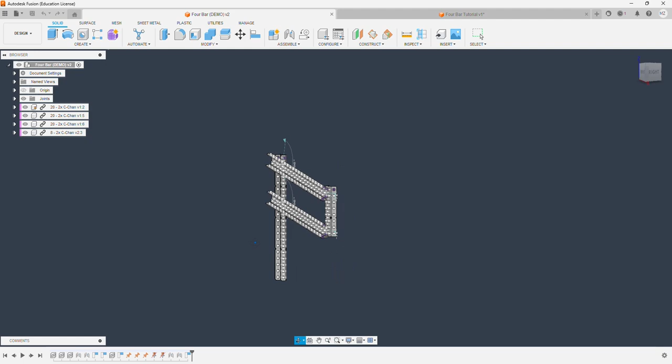So what I have here is a pretty simple 4-bar, and it's made from a series of Revolute joints. And as you can see here, I can just drag the C channel around to simulate movement of a 4-bar in real life. Okay, now I'll be showing you how to actually make this.

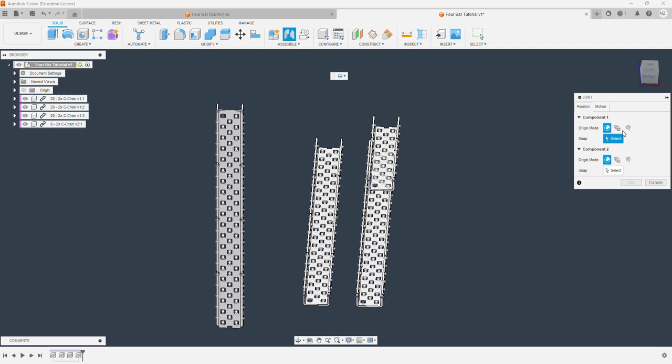So these are the C channels I use. Just import them, you can use whatever length. We're more concerned about the joint here. So first, of course, again, click J to open up the joint menu. And the way it works is the same as a rigid joint. So see here, I have it attached to a point, I have it flipped.

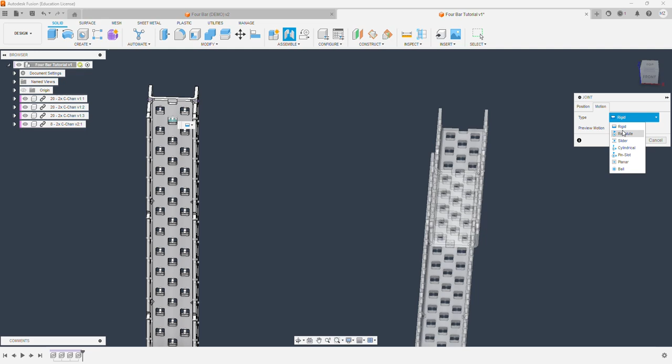And now you have this button here. You can access it either here or on the right side on the joint menu next to motion. So when you click rigid, you'll see a lot of options pop up, and I'll be going over what some of them do later. But first, right now, you want to have a Revolute joint.

So what a Revolute joint allows you to do is it allows the joint, the connection point, to spin on the spot, but it doesn't allow it to slide this way in the other axis, but it allows it to free spin. And we want to use a series of these to simulate the rotational movement of, in this case, a 4-bar, but you can use it to simulate the rotational movement of quite a lot of different mechanisms in VEX. Okay, after that's done, just press OK.

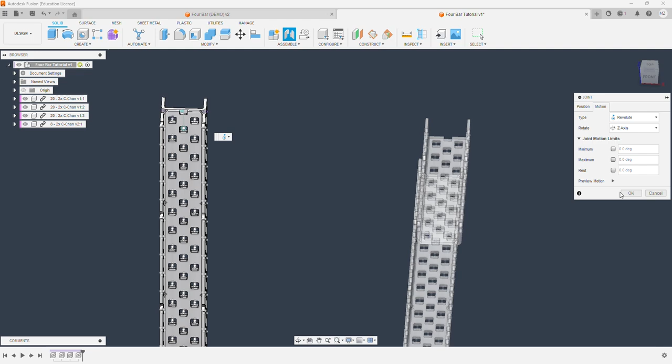And again, remember, we do need to ground a component in this. See, after that's done, you can basically just rotate this wherever you want. And that's basically what a Revolute joint does. If you had a rigid joint here, this C channel would be completely fixed and you could not move it at all. And again, remember to always capture position.

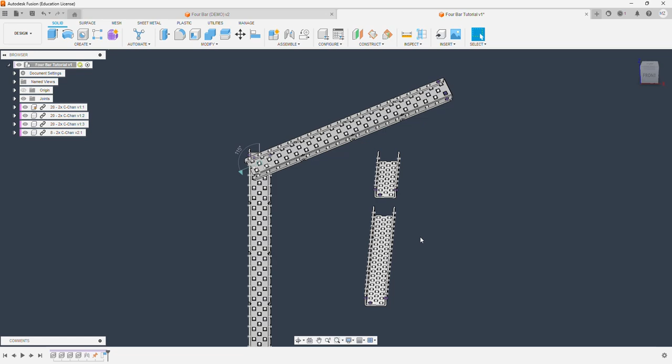Now you've done that, just repeat the same steps. Oh, and one more thing is that since we had last selected Revolute joint, the next joint you make automatically pops up as a Revolute joint. So if you don't want this, you can, of course, just change this to whatever joint you want.

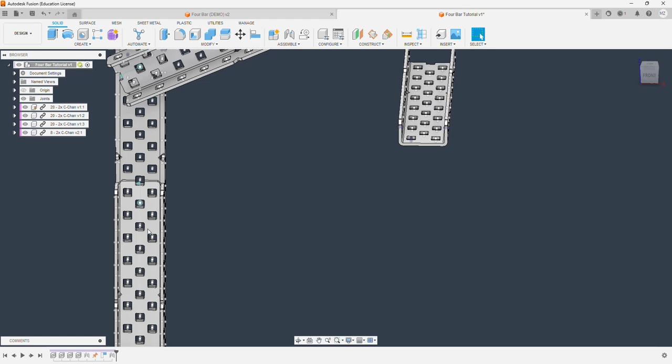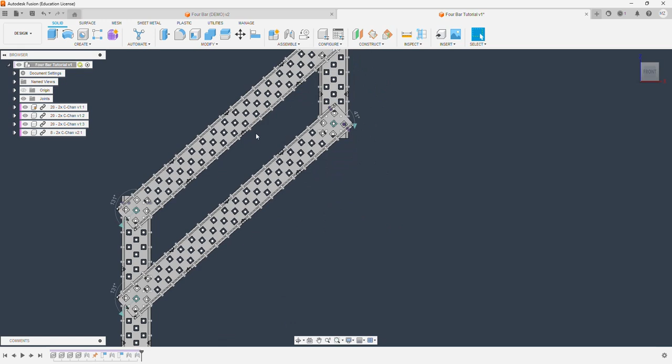Okay, now that we have the C channels attached, we can attach the other end of the 4-bar with, again, Revolute joints. And if you notice here, it does not require you to do anything complex. Once I click the joint button, the series of joints will get simulated by themselves, and they will move. Fusion calculates their movement, so it will act exactly like a 4-bar. So you don't need to do anything complicated if you want to make a 4-bar with Revolute joints in Fusion.

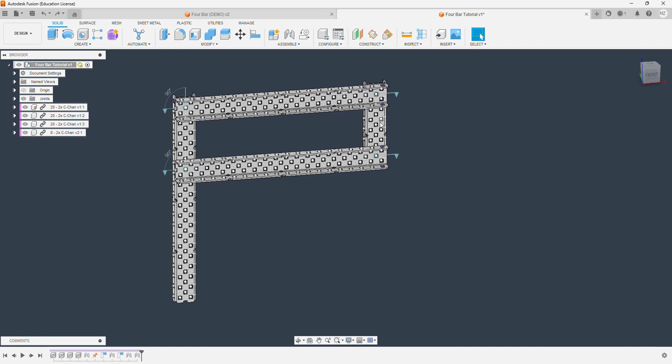A lot of things are kind of automated in Fusion, whereas in something like Inventor, I don't think you actually do, but sometimes you might have to add a constraint, let's say from here to here, or something to match their angle the whole time to prevent this bar from tilting. But in Fusion, quite a lot of this is automated. So usually if you can get a series of joints to work in Fusion, it will probably just work, and probably will work in real life as well.

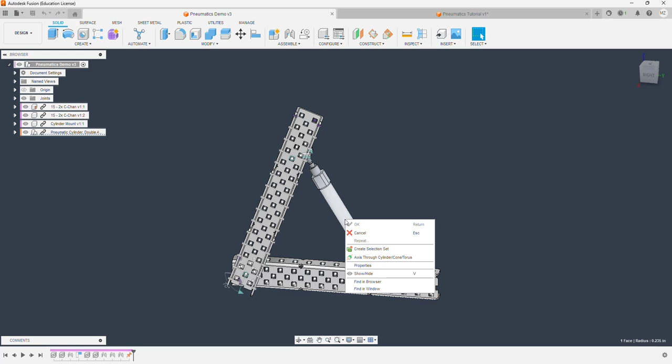Next up, I'll be showing you how to combine Revolute joints with a different type of joint, called a slider joint, to simulate something like a piston movement in Fusion 360. So this is my finished example. You can see here, if I push this, the piston will extend and in turn turn the C channel.

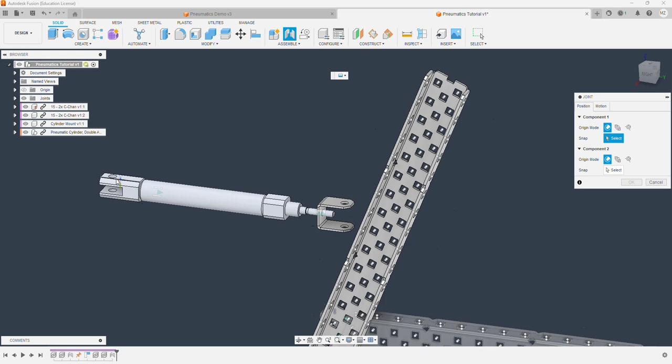Okay, so let's say you're starting from this step right here, where you have the C channel set up with the Revolute joint, as we talked about. And now the question is how do you actually mount the piston on. So if we go back to before, you can see when we extend this piston, the base of it, which is right here, also turns. So what that means is we need a Revolute joint.

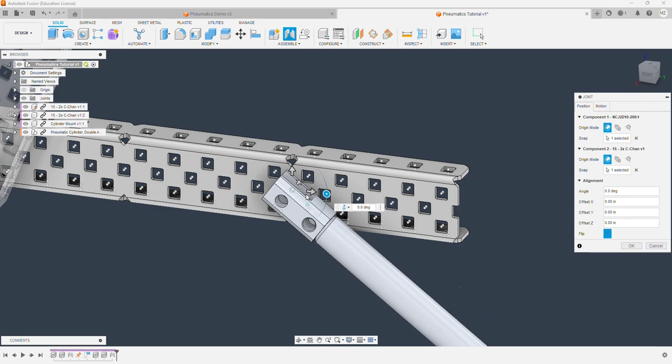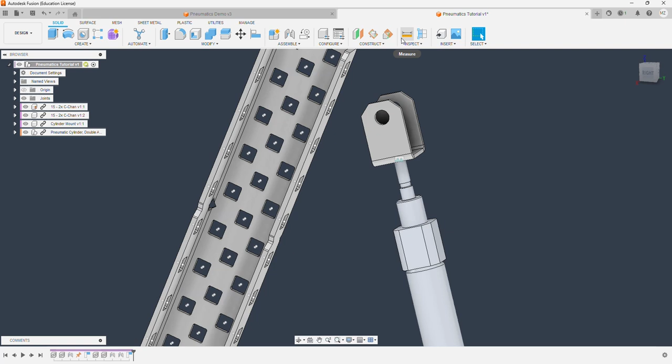Okay, once you have the Revolute joint attached, you can see the piston can rotate freely on the plane that it's jointed on. And now after that is done, what you want to do is join this and this. And since we don't know the actual distance from here to here, and it doesn't need to be exact in Fusion, what you can do is use the inspect or measure tool. And if you get a number like this, you can always change the precision to a very high number, so you can get the full precision.

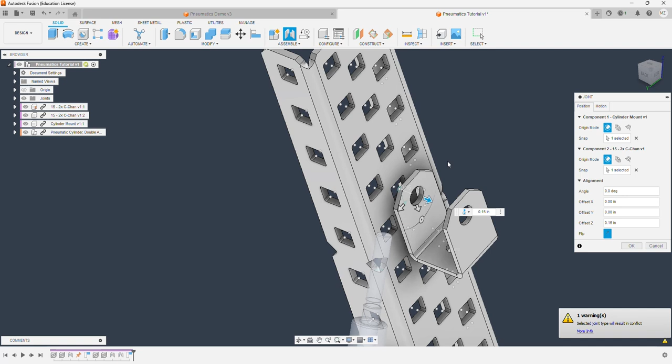Okay, now once that's done, you actually have just finished the whole thing. Because you can see, you can just extend this piston, and the entire system will move with it. Now this is obviously a very basic demonstration of where slider joints can be used, and also where slider joints and other types of joints can be used together to simulate a more complex system.

Other examples where slider joints could be used are, for example, a linear slide, like if you're trying to simulate any sort of sliding motion. For example, if you're trying to build a slingshot or just a linear slide, that's where slider joints are used. But the vast majority of the time they're used to simulate piston movements, because if you really think about it, there's not a lot of mechanisms in VEX that involve linear sliding motions.

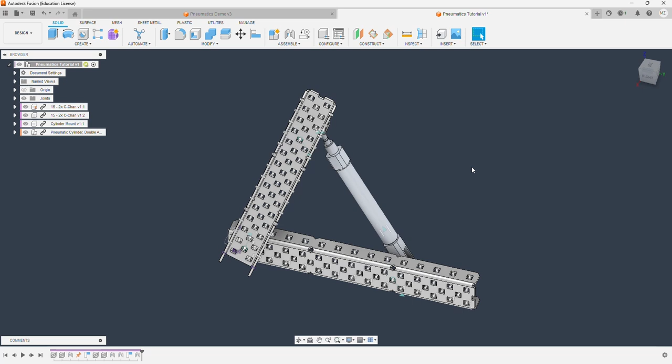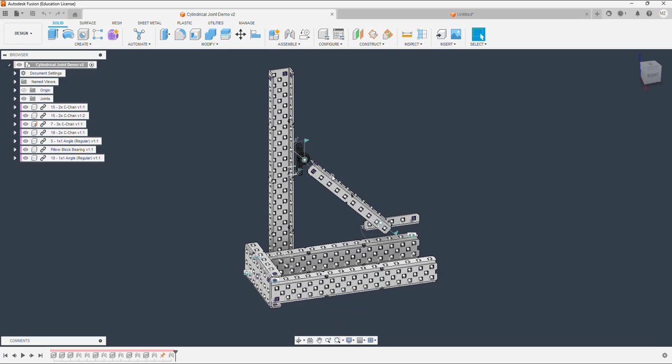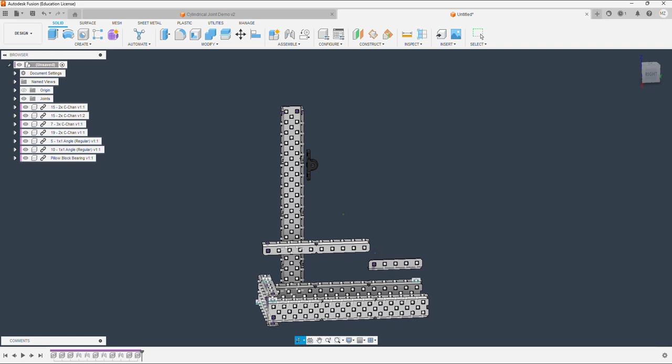Now, if you were to build this with rigid joints in general, it would be really hard because you'd have to figure out what each of these angles are and the distances for these. But I'll show you an easier way to do this. So first, to start off, I already have in this CAD the general structure, and if you really want to follow this, you can just add these together by yourself, and this does really apply to a lot of different things. So first off, what we want to do is add a Revolute joint.

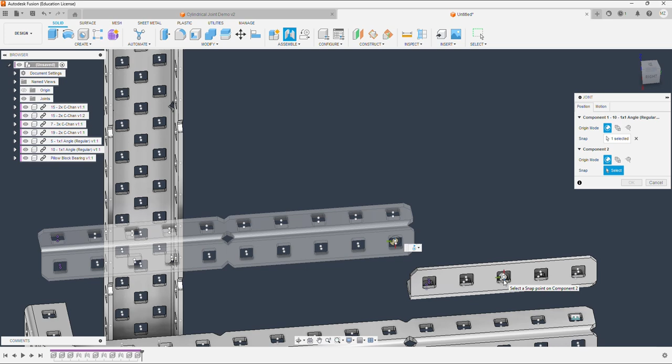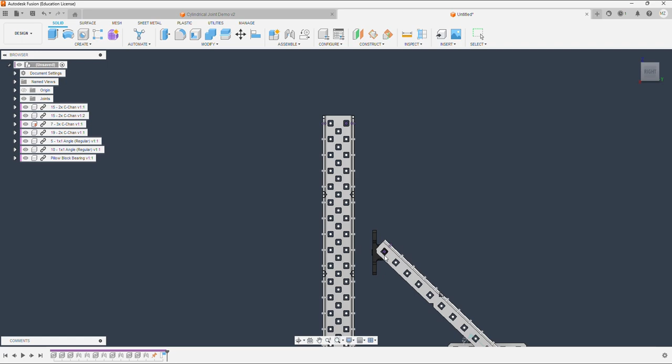Now remember what I said about how Fusion does sometimes make the calculations automatically for you, right? And this is what we are going to be using for this. Okay, now that that's done, what we're going to do next is use a slider joint between the bearing and this piece of C-channel.

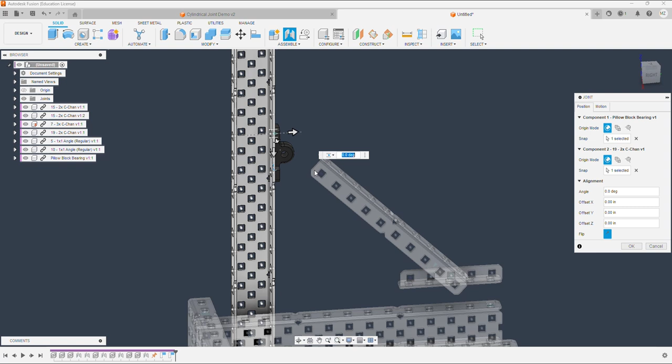And the reason we're using a slider joint here is because we don't really know what the distance will end up being, because we have a fixed distance from here to here, and this joint is fixed at that spot. So if this is a fixed distance, let's say you type in whatever distance you want, then this joint just simply won't happen. There's only one specific distance at which the joint will work, and that's why you need a slider joint. It's because you don't know what the distance will be.

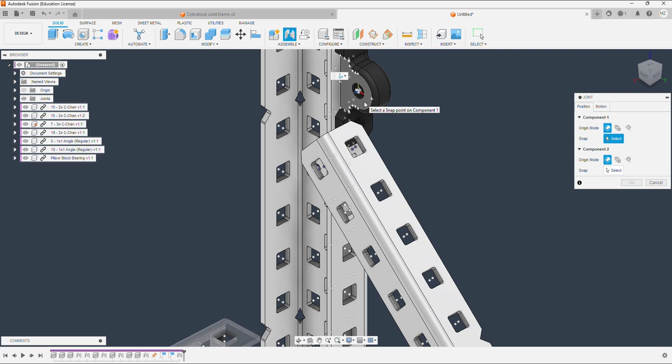Once that's done, we use a different type of joint, which is called a cylindrical joint. This is basically a slider joint and a Revolute joint combined. The reason we're using this here is because you don't know the distance from this point to here. Obviously, you can figure that out using the inspect tool, like I've said before, but often it's just easier to use a cylindrical joint.

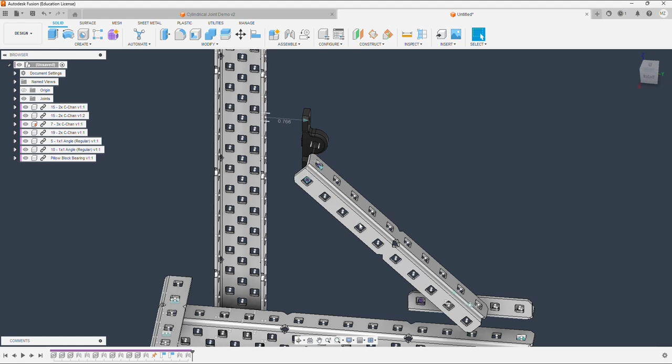Now you notice once I press OK here, obviously this isn't exactly how it is on the thing I showed you before, but that's because I don't really remember which holes stuff is supposed to go on, but you get a rough idea. You see that this triangular bracing here is basically fixed to this pillow block, and the pillow block now has a set distance from here to the C-channel.

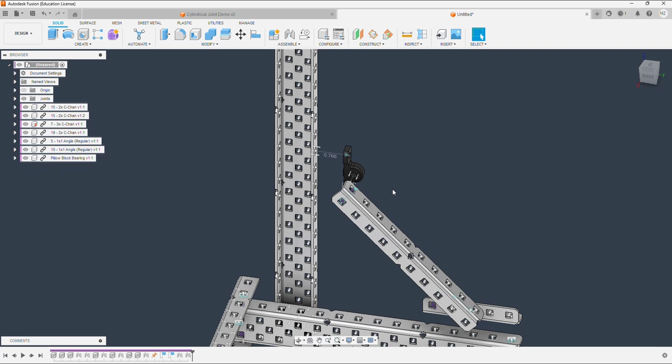Now if we try to move this, you'll notice we can't move anything, because when Fusion automatically computes all the joints, like what this angle is supposed to be, what this angle is supposed to be, and what the distance here is supposed to be, all of them result in basically only one possible solution. Now technically speaking, there's two, because if you drag this all the way to the other side, it will still work, but that usually won't get in your way when you're designing. If it becomes a problem, then just ground one of the components, and this will be fixed here.

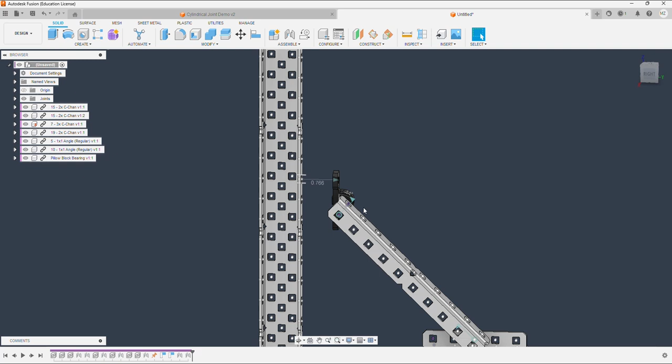And this can be, you can say, abused to make a lot of structural designs like triangular bracing, where often it's really hard to figure out what the spacing is supposed to be. And this could be really advantageous if you use it well, because actually before I learned about this, a lot of my designs were, let's just say, not braced well, and a lot of it is because of how hard it was to make triangular bracing.

And this also goes to show you how joints don't exactly need to be demonstrating or simulating motion. They can also be used for structural designs. Cylindrical joints, slider joints, and revolute joints are really the only things you need for Fusion CAD for VEX. You really never make use of the other types of joints because it's basically impossible to have VEX parts work like those in real life.

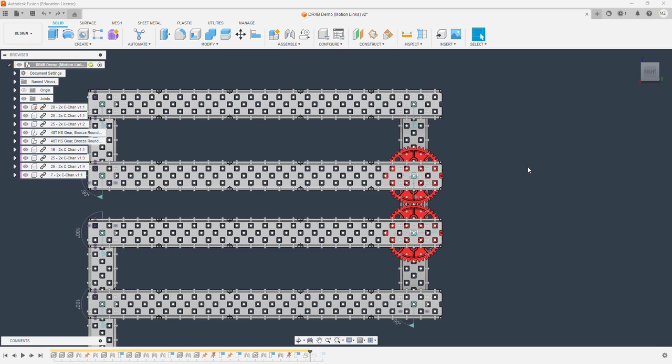Now, those joints are great, but they do have one critical error, which is that they are just individual joints working by themselves. So in this case here, for example, we have two revolute joints on two gears, and Fusion just sees these two gears as individual separate components of different systems. But obviously in real life, when this gear spins, the other gear will spin in the opposite direction.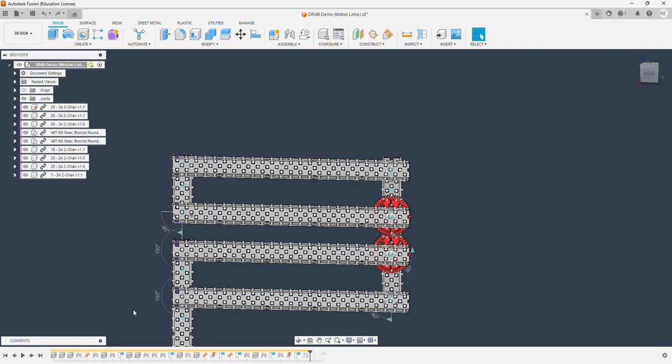Now, that's, for example, how a double reverse 4-bar will work, because when this arm moves up, this gear spins and moves this gear in the opposite direction. But by just using revolute joints, you can see that's not what happens here in Fusion 360. Okay, so how do we actually make it simulate a real life double reverse 4-bar better?

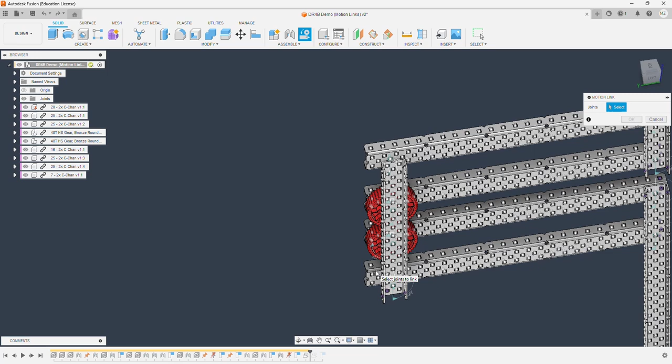So under assemble, you have something called a motion link. What it basically does is it links two joints together, so the motion of one joint affects the other joint, and you can determine what that effect will be. So once you have motion link, all you do is just select the joints that you're trying to link together. Oh, sorry, it appears I already have a motion link. I'll just delete that real quick.

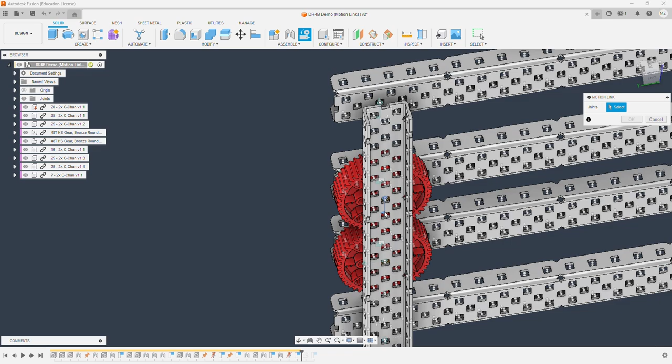Okay, now what you do is you select this joint and this joint, which are the joints you're trying to link together. And once you have this, a new menu will pop up. I'll explain what each of them do here. So this Revolute 9 is the name of the joint, which will probably be this joint. Revolute 8 is this joint, most likely. Obviously, you can change these names under here, joints. Change them to whatever you want them to be.

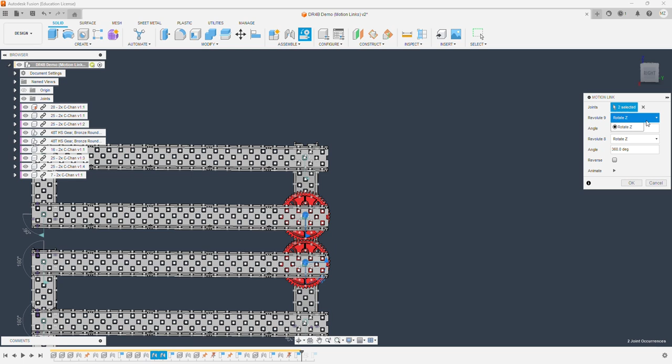And next to it, we have the axis, which will be, I guess, the thing that you're trying to constrain. In this case, since it's a revolute joint, it can only rotate along the z-axis, so that's the only option that pops up. Under it is an angle value, which I'll explain here, because let's say this gear is 48 tooth, this gear is 48 tooth. So what this means is for every 360 degrees that Revolute 9, which will be the top joint, rotates, the bottom joint also rotates 360 degrees.

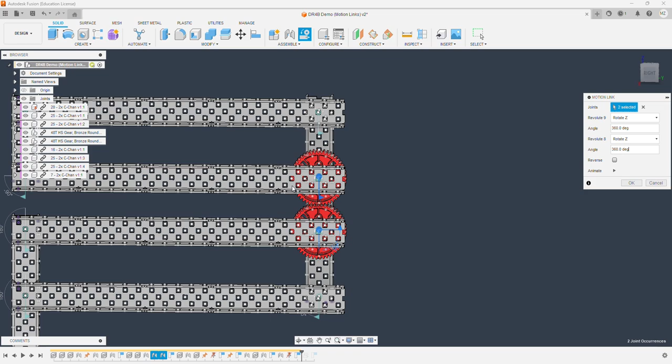Now sometimes you have to reverse this because the gears will be moving in the same direction, but it just happens in this case you don't need to reverse it, and that's a little weird thing with Fusion. You don't really know if you need to reverse it or not, so I would just suggest to just do it and see if it works. If it doesn't, then reverse it. Obviously you can also use animate. It's just a little weird with Fusion on the double reverse 4-bar, because obviously the C channels cannot collide with each other. Once that's done, you just simply press OK.

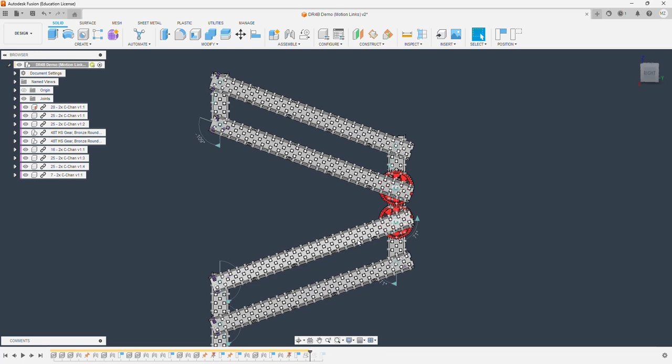And now you'll see when I move this up, the two gears actually spin in opposite directions. And now this looks exactly like how a double reverse 4-bar is supposed to work in real life. Now motion links are not just limited to gears. They can also simulate a ton of other things, but the vast majority of times you will ever need them

is for gears, because with other joints like pistons and stuff, the joints themselves already simulate the movement, whereas with gears, because of the way Fusion or any CAD software works, it does not know that the two can't spin in the same direction and have to spin in the opposite direction, and this is where a motion link is extremely helpful.